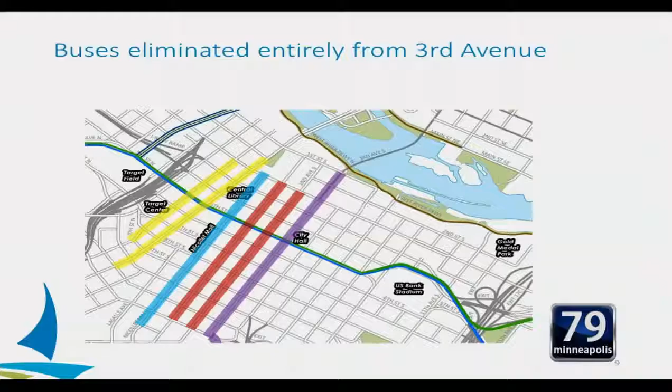But with all the benefit comes a cost, and it has to do with bike lanes. When the design for Marq2 was adopted, the bicycling community was understandably very unhappy that these bike lanes were removed without identification of an alternative. We've been looking for a replacement to those facilities ever since.

Corridors that we looked at included a two-way facility on 3rd Avenue, a two-way facility on Nicollet Mall, and even returning one-way lanes to both Marquette and 2nd. That turned out not to be feasible.

And through the redesign of Nicollet Mall, the city chose not to add dedicated lanes as part of that redesign, rightfully prioritizing pedestrian space on the mall. Now, as part of that process, Mayor Hodges said at the time and since that with that decision comes the requirement that we find an alternative north-south protected route downtown.

So she asked Public Works to identify a route and make a recommendation, and that is what you'll see today with the redesign of 3rd Avenue.

So before we get into the redesign of 3rd Avenue, I do want to take a moment to talk about how we arrived at that as the preferred route. And in doing that, I'd like to talk about 4th and 5th Avenues for a moment.

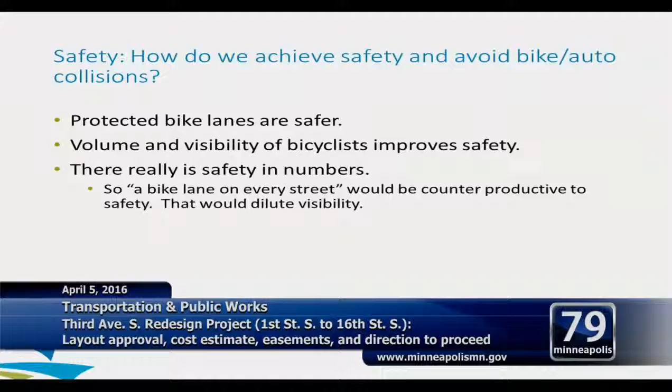It makes way more sense to put protected lanes where bikes are going to be. So where do we want them to be?

Well, Public Works has created the proposed bicycle network downtown, and it provides a good spacing of routes. As you can see, there are not too many routes. They're not too close together, which would create a condition where bicyclists would be spread out throughout the downtown core, and it would dilute some of that visibility we're looking to achieve.

But they're also not so far apart that cyclists can't get from one to the other. And you can also see that the routes on Hennepin and on 3rd both have clear access in and out of downtown across bridges to the north and to the south.

And then the last thing I want to leave you with today is some potential future decisions that a redesign of 3rd Avenue today can provide. Just as what we did on Marq2 created opportunities that we're taking advantage of now, the same is true for the protected bike lane network you see in front of you. A protected bike lane, if and when we add it to Hennepin Avenue, could result in the entire elimination of even the non-protected bike lane on 1st Avenue. And a redesign of 3rd Avenue today could provide an opportunity to remove the bike lanes on 4th and 5th, which could provide space to expand pedestrian access and greening on both of those streets.

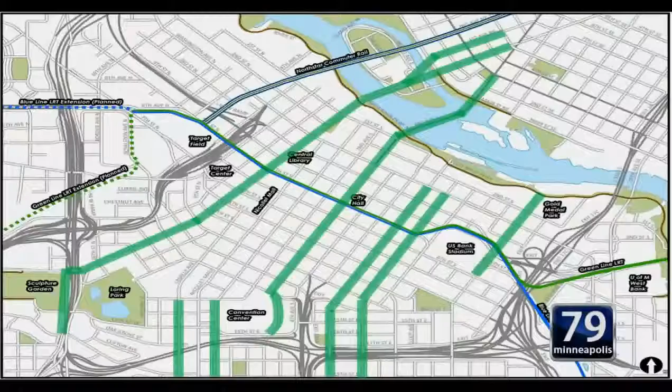It's also the history of the founding of the Minneapolis Bicycle Coalition in some ways. I just wanted to point out with this map that the distance between 3rd Avenue and Hennepin is significantly larger in South Minneapolis than it is in downtown. So if we zoomed this map out, the travel sheds for a bicyclist coming from Whittier, CARAG, the Lyndale neighborhood, or the folks coming from the 11th Ward or the 8th Ward, certainly Hennepin would be significantly farther away than it is in downtown here. So I just think it speaks to the importance of having these parallel north-south routes - one just on Hennepin, for example, would be significantly out of the way for anyone trying to travel by bicycle from South Minneapolis.

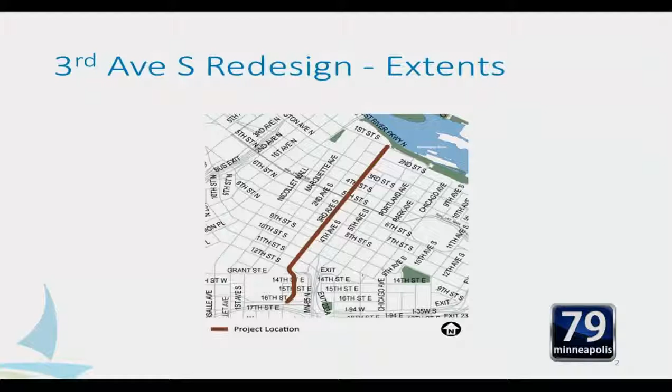Third Avenue South redesign extents. The proposed project consists of reconfiguring Third Avenue South from 1st Street South to 16th Street East, with the primary initial goal of adding a protected bike facility to the corridor. The project includes a variety of right-of-way ownership, including MnDOT highway right-of-way, Hennepin County right-of-way, and is primarily a City of Minneapolis designated state aid route.

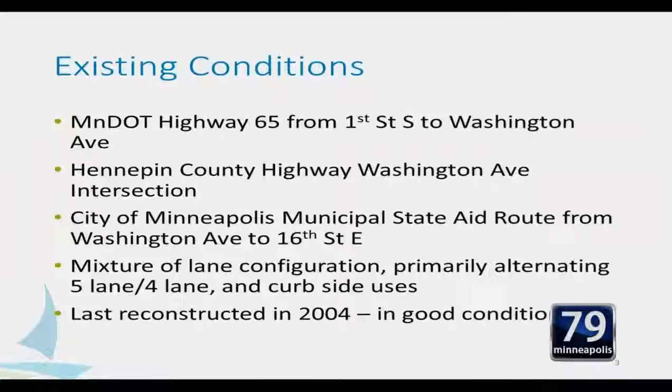The roadway is generally configured, as has been expressed before, in a 5-lane configuration with alternating blocks of center left turn lanes or a center planted median. A variety of curb uses is also present on the corridor. The roadway was recently reconstructed in 2004 and is in good condition and good pavement condition.

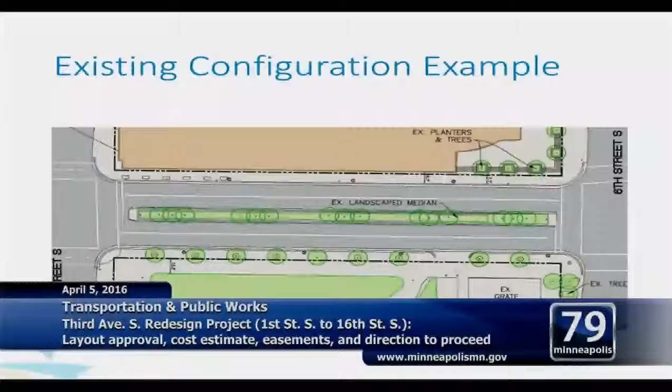Showing an example of the existing configuration that's out there today, you can see the center green median and 2 drive lanes. We don't show any of the curb uses on this block, between I believe this is 6th to 7th, but it does show the right-of-way extents and the number of trees already located on the corridor. On the alternating blocks, where it does not have the median, this median is replaced with a dedicated left turn lane.

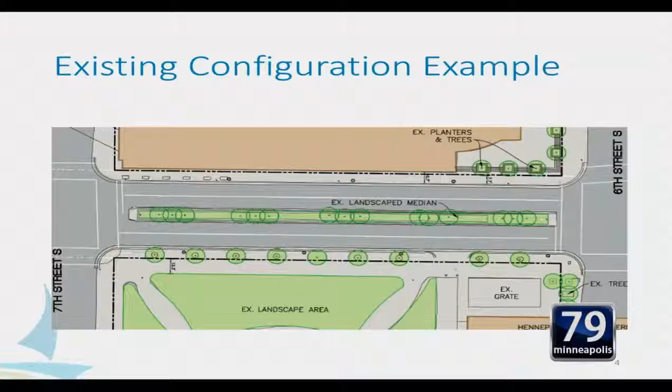The corridor supports a variety of different modal uses. From the 2014 counts of vehicle traffic, it ranges from the mid 6,000s at the convention center to almost 12,000 vehicles per day north of Washington Avenue. It also supports approximately 4,400 pedestrians a day, as well as, as has been previously indicated, a relatively high bike count of 850 bikes per day.

The bike facility is identified in the protected bikeway update to the bicycle master plan. The corridor was selected, as previously explained, as a primary north-south corridor for bike traffic, as part of the coordination of a variety of specialized corridors in the downtown core transportation system.

As part of the stakeholder engagement, other goals were identified: improve pedestrian space by adding greening areas, maintain existing greening space as much as possible, and mitigate and minimize impacts to vehicle and commercial traffic for ingress and egress to buildings, deliveries, and other property needs along the corridor. These were all identified through the engagement process.

Project development, as indicated by the director, started in April 2015 with study and evaluation, initiating the 4-lane configuration. We developed more of an alternative analysis - what other concerns, things, or options are out there - adding greening into a 3-lane configuration south of 8th Street, which was driven by volume considerations of vehicle traffic along that corridor. We came out with a different configuration that was viable, workable, and addressed a lot of the concerns raised up to that point.

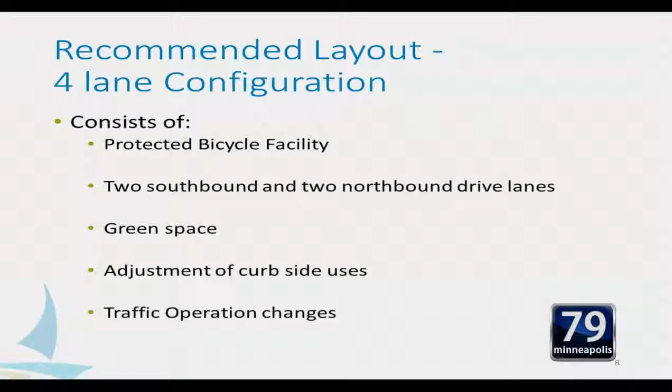We have a few curbside uses that will be adjusted, including removal of parking in locations that are in direct conflict with the bike and travel lanes. We're working with Metro Transit on some new bus stops on 3rd Avenue north of Washington and the existing drop-off bays.

As an example of the operational changes we're incorporating, we are proposing a signal system upgrade to a video vehicle detection system for the purpose of timing the left turn arrows, not lanes.

What I'd like to do is walk through the layout briefly. I want to emphasize some of the more contextual aspects - how it separates and goes through - generally shown in 2-block increments. I'm going to start at the river and head down towards 94.

The first section I'm showing here is the MnDOT right-of-way. We are proposing to remove the parking and we're adding the buffer bike lanes, consistent throughout the corridor.

We have a couple of additional bus stops - one in front of the federal building, which is up here, and one in front of the new development, where they're adding a bus stop shelter as part of that construction effort.

And we show green space on this corridor here - this property is an opportunity. We're still coordinating, as it is all sidewalk, and that green space is on federal property.

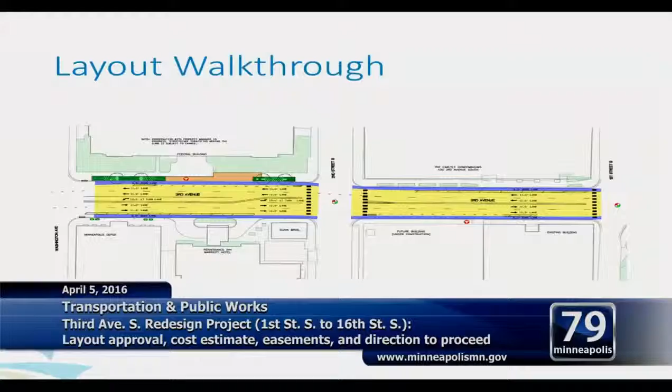The next section is just south of Washington, so it coordinates with and goes into the MnDOT highway section, but it also crosses the county right-of-way at Washington. What we're showing there is some changes to the configuration of the drive lanes and facilities coming into Washington. We did receive a variance for narrowing up the drive lanes at that location to accommodate and allow for the bike facilities.

We also received a variance from Washington to 7th to narrow our drive lanes for that corridor. In general, we're showing a lot of green space throughout the corridor—you can see some green little boxes here, and we also have a couple of green spaces. We are still coordinating those efforts. We want to talk to property owners as well as the DID to make sure we're going to put something in that's survivable, that adds benefit to the corridor and isn't going to be a maintenance nightmare into the future. These are opportunities as we're showing them, but there will be a lot of conversations to make sure we're doing the right thing.

Another element I want to quickly point out is what I call zebra striping. You don't see this on a lot of city streets yet. You see it on MnDOT facilities as well, right through here, but these are a bit different—a little bit wider for the city's portion—and they definitely frame up that pedestrian corridor through the intersection. This is a new city element. We're working on developing this protocol, so some elements may change, but we're anticipating implementing it on this project.

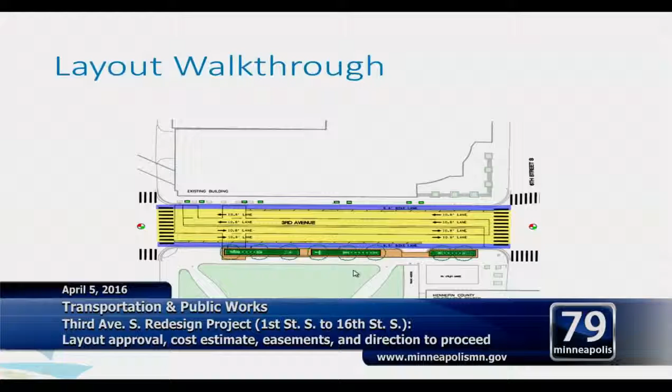As I mentioned, this switches to the 10-foot drive lanes. This is where the volumes of vehicles traveling through the corridor fall below the critical criteria threshold we see for a multimodal corridor, so we're able to do a 10-foot drive lane. We still have the bike facility.

You still see the—did I not move this one? There we go. Still have the bike facilities, still see the drive lanes

coming through the corridor. You don't see a lot of additional green space here. A lot of the green space we're able to find is very dependent on maintaining the 8-foot clear zone we want for the downtown environment. There's a lot of utility operations on the corridor—not so much at this location, but utilities are present. There's also areaways and underground parking garages that we're addressing and coordinating with to see where green space is practical.

Question from Councilmember Bender: Mr. Engelman, before you move on to this next part, could you go back through this northern section and talk about why the original determination was made that 3 lanes are not feasible here? What were the trade-offs with vehicle travel delays, and how did you determine that those were unacceptable from a staff perspective?

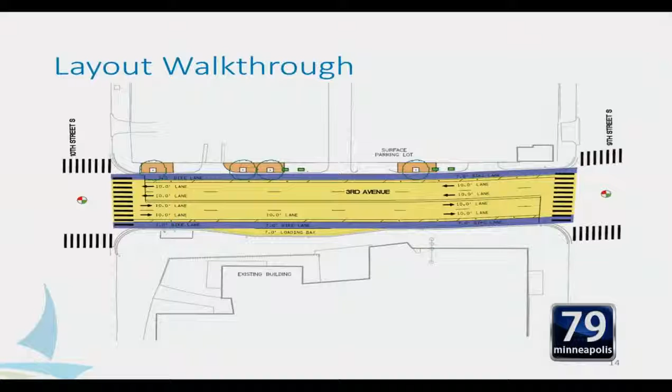This block is pretty straightforward as for these other ones as well. Some of the benefits are we were able to find some spots on this block that had open utility space, enough space that we could put in a tree or four and have enough root media to substantiate that and grow that into the future. We do show a loading bay or a drop-off bay at the Ameriprise building as one of the curbside uses that we're intending to maintain.

The next section, continuing on the south end, we're showing the 4-lane configuration still through. There's not a lot to be added conversation-wise to this section. And then coming around the corner, around the convention center, we're showing 2 lanes into the south and 1 lane to the north.

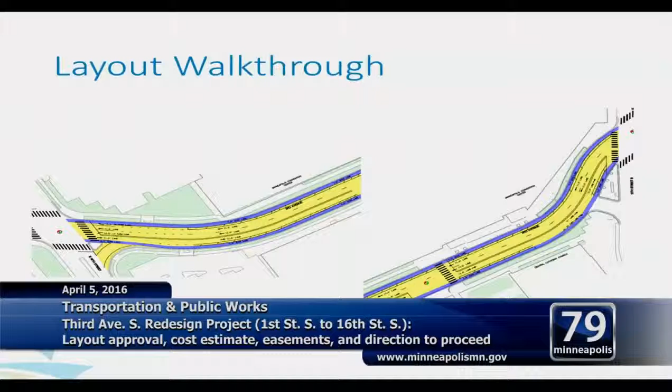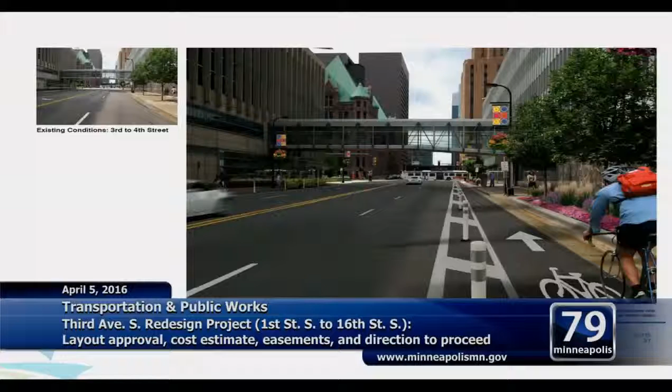This is a nice graphic that we have that kind of gives a feel for what the 4-lane configuration looks like. It shows the buffered bike facility and the delineators that we typically use in these environments and corridors. You have a bike facility against a 2-foot curb. You also see some of the green space that we're trying to implement along the corridor.

This block is right next to the Public Service Center and gives a feel from the existing conditions to the proposed conditions. You can see the turn lane in the center would be removed, and you have 4 drive lanes going forward.

The project is on a short timeline. We're wanting to implement this project this year, as a proposed project start in 2016. This would be primarily the hard surface pavements, and we want to put in some temporary markings to have a bike facility and operating vehicle facility this end of this year.

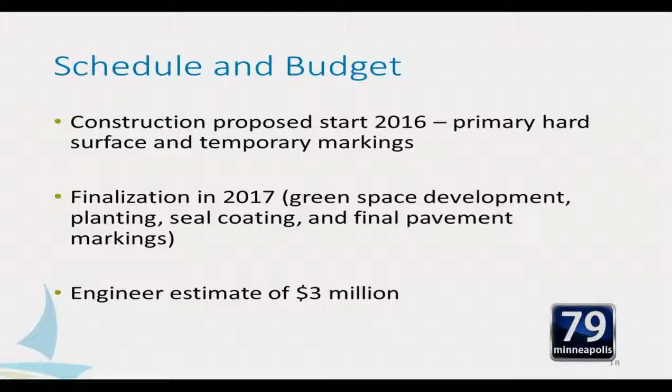We anticipate that we would want to come back and finalize this project in 2017 due to the coordination and efforts of the plantings, and making sure that any green space we'd have would be able to have an irrigation system as needed. It'll also allow us to have a seal coating during our more typical July timeframe, and then have the final durable pavement markings placed at the same time. Our estimate for the project is $3 million.

In summary, we're excited to move forward with this project. It's provided a great addition to the downtown transportation network and improvement to the corridor. Hits on a lot of the points that Brandon brought before. This is a necessary north-south connection. We have a lot of bicyclists using the corridor, and we want to get that facility out there for them to work. It augments the multimodal nature of our downtown environment.

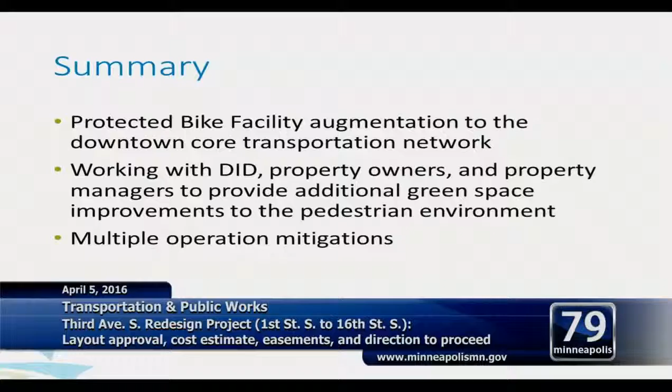And working with the DID property owners, property managers to provide the additional green space improvements to the pedestrian environment, we'll just go further along that path to make it a good central business corridor. The neighborhood properties, advisory groups, and other stakeholders were very helpful in identifying the concerns and elements that would make this project a success. The communication path will be maintained and continued as we move forward, and we'll have to close the loop in communication about this short timeline and engagement.

But the engagement has not stopped. We will be continuing to have the conversations. We're excited to see a finished corridor as an example of the mixing of many modal choices that you have in the downtown Minneapolis environment. Thank you for your time.

Thank you. And I'll just note that we have significant elements that are still in play, and I've had communications with the local representatives on the city council. So what I'm going to do is move without recommendation the project layout before us and take further conversation.

Councilmember Gordon: Thank you. I had a question about the layout, so I was waiting till the end, particularly about sidewalks. I noticed that when we were looking at the layout all up and down, we knew the number of feet for bike path and travel lane, but we weren't showing the number of feet for sidewalks. What is the optimum width for a sidewalk in downtown? What's our goal? What's our minimum? It definitely looked like there was one loading dock that got added, and it looked like there was a 12 or 15-foot sidewalk — I think that might have been by the Thrivent building. So were we looking for an 8-foot sidewalk minimum, or do we have a minimum? That's a great question.

Can you go back to the 3rd Avenue area that is just outside this building, outside of City Hall? One of my chief concerns that I've voiced since last summer has been about how police maintain the best, safest access possible to the drop-off area accessed here. It's used for juveniles, and it's critical that we not be any further away from that entry. The other important aspect of this side of our building is pedestrian improvements. It's a major thoroughfare, and the Pedestrian Advisory Committee expressed significant concerns about it, and I think that's very warranted.

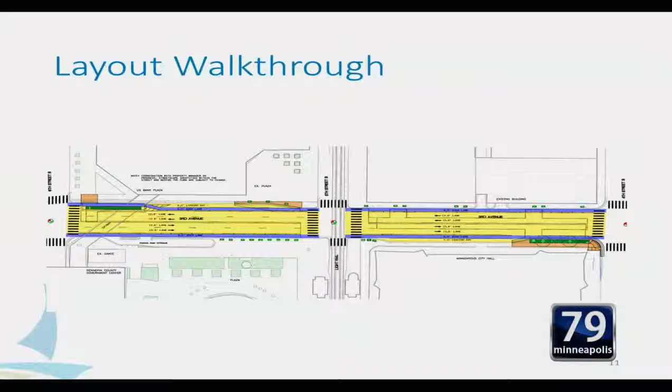Mr. Engelman, would you say that this is improved from a pedestrian standpoint, and can you assure me that while we've reduced the number of vehicles that can be parked here, it is understood that this is still for police as they need to access it?

This is the area of the building that you're talking about, just the lower right part of this slide you have up? Mr. Chair, yeah, if perhaps if I could answer that.

First off, in the pedestrian advisory resolution, they indicated their concerns and problems with the sidewalk adjacent to us right here along 3rd between 4th and 5th. We are in total agreement. That sidewalk is inadequate, actually inadequate on both sides of City Hall here, and it does need to be addressed. This project is not going to resolve that issue. We agree that it needs to be addressed, and as I mentioned to the chair, we will continue to look at providing a better sidewalk environment there.

There's a couple of issues at hand. One is police department operations, so we need to continue working with them to see if we can find alternatives to parking. The other issue, which put it outside the limits of dealing with it during this project, is this building has what we refer to as an areaway, so the basement extends out under the sidewalk, and the manner in which the streetlights are tied in there makes it a complicated situation. Not that it can't be resolved, it's just going to take more work, both from an operational perspective and from an engineering perspective, to make those corrections. There will be some improvements made with this project, but we are really not going to resolve the real issue, which is we need to widen the sidewalk along that corridor. Thank you.

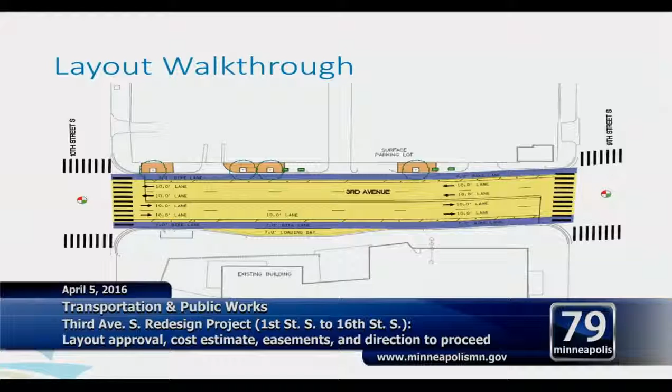And putting in more of a structural soil system underneath the sidewalk. We still have to taper it back from the curb line to make sure we're not undermining the curb. So when I say curb isn't being removed, we are removing small sections of curbing to do that. We don't believe we need to do this at this location, but we'd want to put in 500 cubic feet of media for these trees to really have a chance to grow, and that will not impact the sewer line or cause any kind of backup.

It sounds like we're not impacting the sewer underneath it. That's the intent, yes. Thank you. That's it.

Councilmember Yang? Thank you, Mr. Chair. I just wanted to point out that I thought I heard you make a motion to forward this item without recommendation, and then I heard Councilmember Bender make a motion regarding what she passed out in front of us. It seems like those two motions are competing, and I'm wondering if we could address one before the other.

We would take the substitute first. My recommendation is to do the motion that I made, because it accommodates the time to work out some of these other issues—the secondary and tertiary components of this project—knowing that in no way, shape, or form is the primary objective in question. So it's more about the issues on the edge.

So with that, I do have several more questions for staff. We didn't get to the southern section and vehicle volumes, service levels, any of that. So I just want to acknowledge that. So you have more questions. Okay, significant. Okay, so Councilmember Glidden, then Gordon, then you.

If Councilmember Bender has more questions, I'll let her go, because mine was more of a comment, though we're getting down to the debate between the multiple layouts that have been out there. I don't know if staff has brought any visual so we can understand the 3-lane design, knowing that staff's recommendation is the 4-lane, which you've presented. Thank you. Councilmember Gordon?